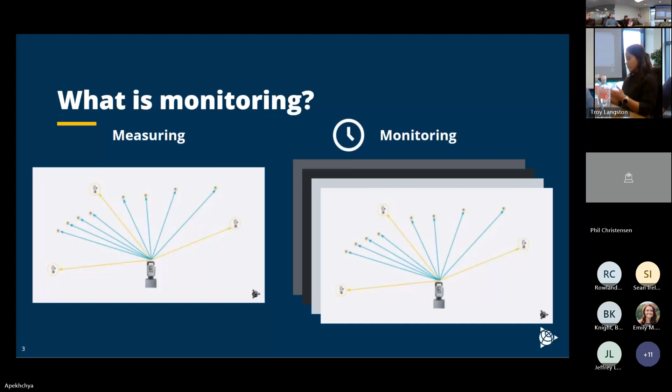So more technically, monitoring is identifying the displacement or the deformation of a structure, an object, an area. And then this data that you get from monitoring is then used to see if any action needs to be taken for a project. So in construction sites, there's constantly something happening. There's big movement, whether it's excavations, moving heavy equipment, or the actual building of the building structure, and all that.

So a lot of movement, and the after effects of all this movement are not only within that construction site bubble. And depending on the scale of the site, its effects can be pretty substantial. And so that's where we come in. I'll get into what we do a little bit later. First off, I'll go into why we need to monitor in the first place.

So let's take a look at some disasters that have happened in the past and how monitoring could have prevented it. In 2007, the Interstate 35W bridge collapsed over the Mississippi River. In 2023, last year, there was a massive sinkhole in Daisetta, Texas. Hopefully I said that right. In 1976, there was the Teton Dam failure.

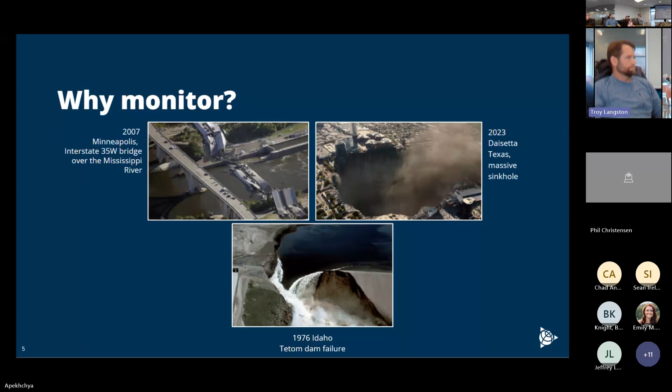And so these are very few examples of many that have happened over the last 100 years, where there have been big construction projects going on, and it wasn't properly taken care of. So with the context of those disasters in mind, why do we monitor? These disasters represent where monitoring systems could have provided insight to the operators, the project managers, and any stakeholders for that project before any critical failure points.

Monitoring, first and foremost, is for safety. Safety for workers and safety for the public. In addition to safety, if failure can be predicted, there can be actions that can be taken to prevent that failure from happening. And that way you can reduce costs of building, repairing, as well as any liabilities.

Finding these trends within movement can give a lot of insight into the structure's health. So for example, the expected lifespan of a concrete structure before it falls. And so this is related to managing the risks that are associated with any infrastructure. All structures have an inherent level of risk, and having the right data can help owners manage these risks and take actions to mitigate them.

And with all this being said, decision-making is made way more efficiently when you have real-time data for displacement trends, and when you have this data at the right time and in time. So we have two major categories in monitoring. We have the semi-automated systems, which you use for slow, subtle movements like land drift. The area or project is surveyed once a day, once a week, once a month. You don't have to do it too quickly or suddenly.

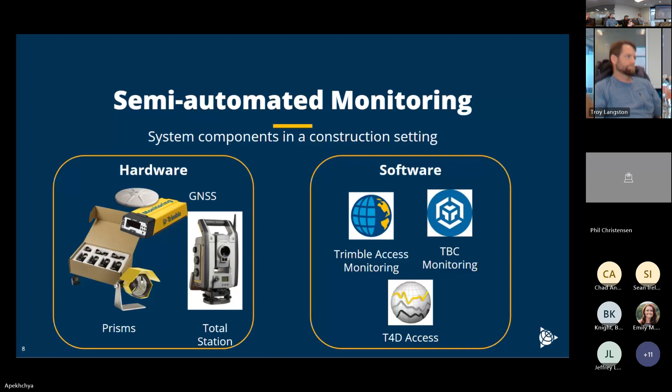So in automated monitoring, there's a couple more moving parts compared to the semi-automated system. So of course, you're going to have your prisms and your total station. And you're also going to have your M1, which is sort of a router, but it does a lot more work. So it manages and controls your total station, so you don't have to constantly aim your total station to every target every hour, or however often you do it. And then it sends all that data back to T4D.

And of course, you're also going to have a place to place the M1. So an M1 cabinet, a place to set your total station in the housing, a place to have all your GNSS equipment and all of that.

Some common sensors that are used in automated monitoring. So it's not just measuring positions. In an automated monitoring system, you can measure water levels, the temperature, stress on planes, if cracks are getting bigger, et cetera. So some common ones include piezometers, temperature probes, pressure cells, strain gauges, displacement sensors,

and all this data from the sensors is connected to the data logger, which is connected to the gateway, which then sends all that data to T4D. And you use T4D Control to process data and T4D Web to show data to stakeholders, to turn alarms on. And we'll go over T4D a little bit later on because it is a pretty big and significant software and a really big piece to this whole puzzle. Yeah, essentially, that's where the sausage is made.

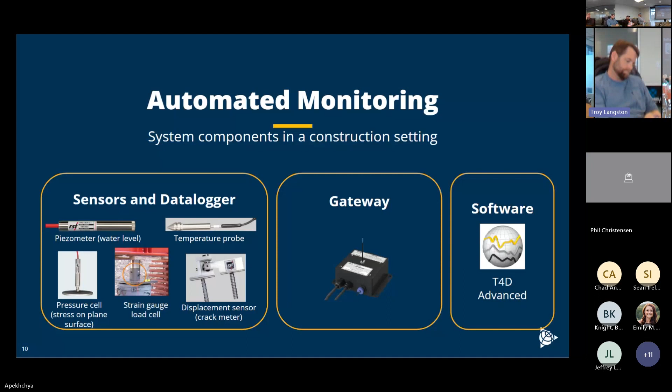So we get overwhelming amounts of data from all these sensors and total stations and receivers. And we need a really good way to organize it all, and we want to somehow make this data meaningful. So with T4D Control, we can enable automated movement detection, and also support informed decision making about the infrastructure. So you can manage your sensor data and how this data is being used at the same time as other systems on the site.

You can also process the data both in real time and for post-processing, using total stations, GNSS, and sensor data. You can also do a network adjustment of data from multiple total stations. And if there's a lot of data that you need to process, you can actually use several engines to process this in real-time and post-processing workflows. And you can do this all simultaneously to process the data in multiple ways.

There's also a lot of ways to analyze this data, and T4D provides a super comprehensive way to analyze it all, and also to present that analysis and data for people who may not necessarily do that analysis, but are involved with the results. Roland will be giving a short demo of T4D later on as well. And it's a super useful tool to both process everything and to tailor the viewer's experience to effectively communicate whatever it is that you need to communicate to the responsible parties.

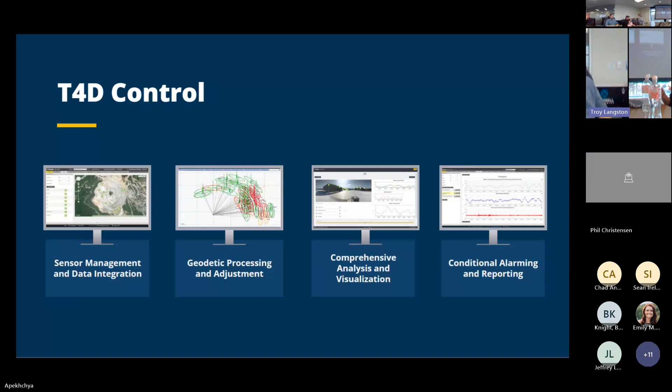All right. So before I go into more specific detail, are there any questions or comments? So I guess for people that have been doing a lot of manual monitoring, have you been mostly using just Trimble Access or SiteWorks and measuring manually, just shooting points? What do you guys do for your deliverables there? Do you just put them in an Excel sheet and send them out? Yeah.

Has anybody tried the Access Monitoring module? Would you like to? There's a 30-day demo that comes with all the Trimble Access licenses, so you can try out all the different modules. And most of the time, 30 days will get you through a pretty short monitoring project. So if you have something coming up, just load the demo on there. The Access Monitoring module is kind of the most intuitive module to use in Trimble Access. You don't need training or anything special like that. It just does what you hope it would do.

And so I recommend if you have something coming up, just download it, throw it on there, use it for an hour before you go out there, just so you're familiar with all the buttons. And it'll run and just collect all that data for you without having to go and shoot all those sites manually.

So it's a huge time saver. Just to bridge the gap on that a little bit. So this is through the Trimble Installation Manager on your data collectors. So if the data collectors are online, you can run the Trimble Installation Manager. And this is what Roland was talking about. If you just look at additional modules, all the different modules will show up there. There might be 8 or 9 of them now.

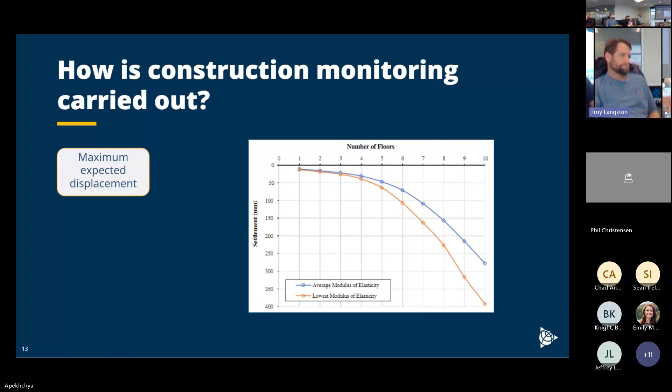And you can also create displacement expectations based on the typical and natural movement of the area or the structure as well. Then depending on what the allowable limit is, you can determine what your accuracy requirements are. So what type of equipment do you need, or what type of surveys do you need done. Then you get into the initial survey design phase. So what does the site look like? Where do your control points go?

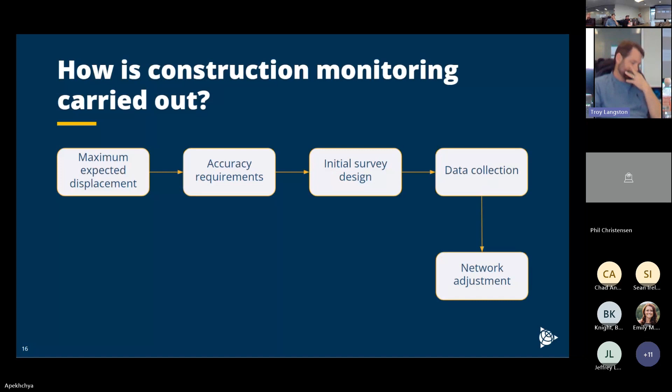And before any work is actually done on the site, reference points need to be permanently monumented outside the region of influence, which is the area that will be impacted directly from the construction area. And fixed monitoring points should be placed on the object or an area that you need to monitor. And this can be placed either during the initial design phase or when you're doing the data collection. So during data collection, you do the actual survey, and then you do a network adjustment, just as you would with any survey.

And then you do the modeling of any deformation that might be happening. So is there any significant deformation happening? And this could be through Excel, which is very accessible, but it can be a little bit complicated. Or you can run this through a dedicated software program. So this is a screenshot from T4D. And all this data is automatically fed into T4D. And you don't have to move any USB sticks or whatever is used to load it into Excel.

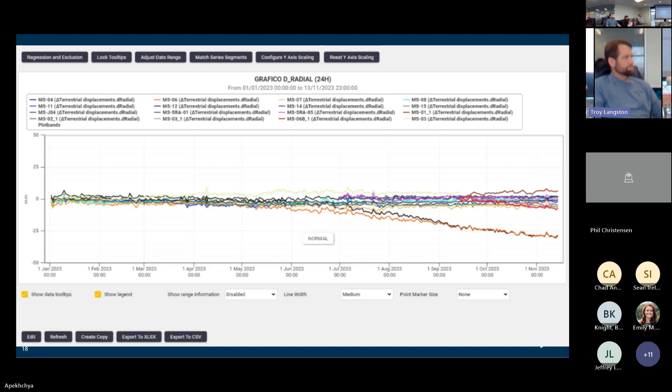You can see that the two targets, the orange and black over here, are for some reason moving way more than they should be. It should be fairly level. And so now we know we need to check, is there anything happening with these targets? Do we need to send out people to fix something on the site? Or is it just a target that moved? Who knows? We need to actually send somebody out there to check on it. And so, yeah, this is super useful for that. Then finally, the data is presented to stakeholders and the people who actually make the decisions. Any action that needs to be taken is taken.

All right, so then, why do we need to monitor in the first place? What is its importance? Firstly, we need to quickly detect the early signs of a structure's movements to avoid any disasters. So, for example, if there is an excavation or some kind of heavy construction work near a standing building, it's important to monitor the building's movements, especially if there's people in there. It's the responsibility of the construction site managers to make sure they don't negatively impact their surroundings.

And once movement is detected, how can further movement be prevented? Usually more movement means more chances of a structural collapse. How do we prevent that? And it's much more expensive to reconstruct a site than it is to check for movements in the first place. Cost is one thing, but any drastic movements could also come with a potential loss of life. Properties can be damaged if a building or structure moves or tilts too much from its allowable movement. There's a lot of substantial repercussions that can come from it.

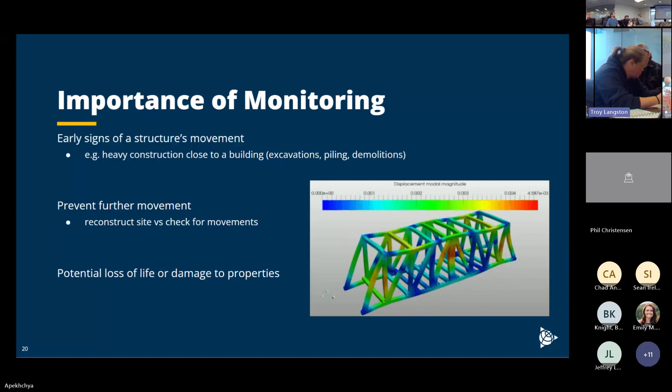So, as I'm sure all of you know, construction sites are extremely busy. There's always lots of people moving around, moving things around. Multiple tasks are happening all at once. There's equipment and material and dirt constantly being moved around. And because of that, if you measure the position of something on site at the beginning, that position might not necessarily be the position of that object the entire time.

The consequences of that can be potentially drastic and even fatal. So if a nearby infrastructure moves and it's residential, then an evacuation needs to happen right away. There's a possibility of a collapse, which can cause injuries, property damage, death. If soil on or around the site moves, then that means the infrastructure on that soil has the possibility of moving as well.

Both infrastructure, like buildings and whatnot, but also trees, and there's a lot of regulations that you have to follow for flora and fauna as well. Soil movement can also affect underground structures that you can't necessarily see. And so there are a lot of connections to soil movement. And if you don't detect movement in time, it can cause extensive delays to the projects, and it can even get canceled.

Now I'll be getting into where we... so we create monitoring systems for all sorts of application types, and our more general solutions can fit the bill for a lot of application types. So firstly, I'll get into excavations. I'm sure you all know what excavations are, but essentially excavations involve the removal of rocks and soil and other materials on the construction site to prepare for building whatever it is that you need to build. Excavation is also very foundational for a stable and level foundation, and that pun is intended.

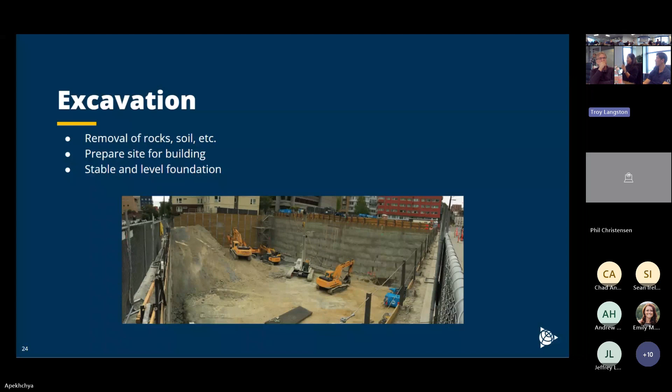So the removal of soil takes away a lot of structural support for the surrounding area. So that means safety is compromised. A lot of work is needed to ensure that either the surrounding infrastructure isn't affected, or some kind of shoring or supporting structure is added to the area. And bigger surrounding infrastructure, so commercial buildings or crowded infrastructure downtown, let's say, also means that a greater force is exerted on the excavated area. So if there's retaining walls that are put in place to either prevent movement or as a fix for movement that has already occurred, you still need to make sure that the wall itself isn't moving either. And these are just examples of how a retaining wall could move.

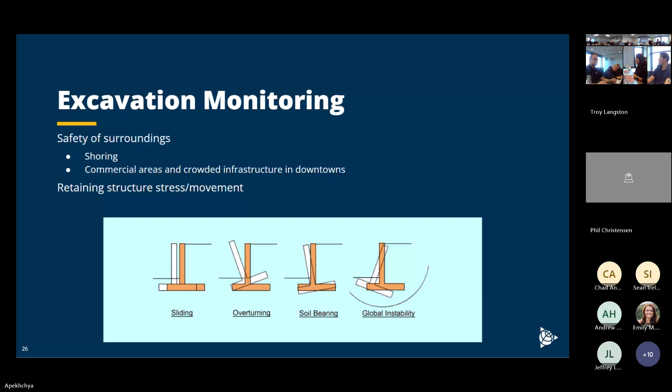Excavation monitoring also ensures that the construction design can work with the current site parameters, because your initial assumptions aren't always going to remain the same. The design can also be accepted when monitoring models show that the extent of any failure is controlled by the additional support that was added onto the site, that the support isn't overstressed, and that the displacements that were detected have been stabilized. And so when displacements are monitored, the predictions of the design plan can be confirmed.

And last but not least, the structure still needs to be monitored even when construction ends. Any changes or risks that happen to the structure after construction has ended will need to be translated to the building owner, especially in areas that have unstable ground, or areas that have a lot of climate change or something like that, and it's not a very stable area. So now I'll get into structural monitoring.

So what you're monitoring is structural health - what is the structure's integrity, and is it safe to be on? Monitoring can identify and mitigate potential risks or vulnerabilities, providing data for informed decision-making during design, construction, and operation. This extends the lifespan of the structure through proactive maintenance rather than reactive maintenance.

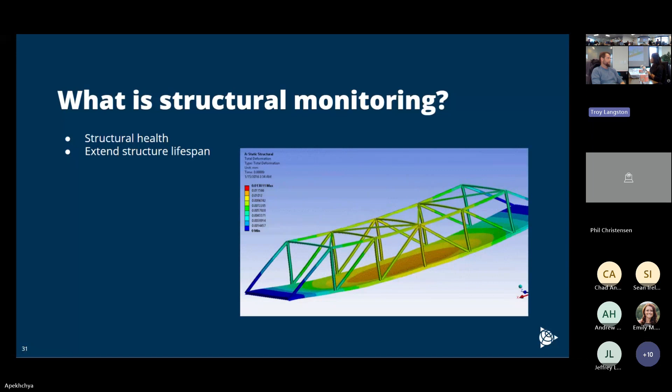However, in this case, you can see it's moving way, way more. The bridge deck's movement is way over the given threshold, and it's going into the red. So this needs to be brought up to the right people to take the proper action.

So what structures can you monitor? Buildings, bridges, dams, tunnels, heritage sites - basically any physical object can be monitored.

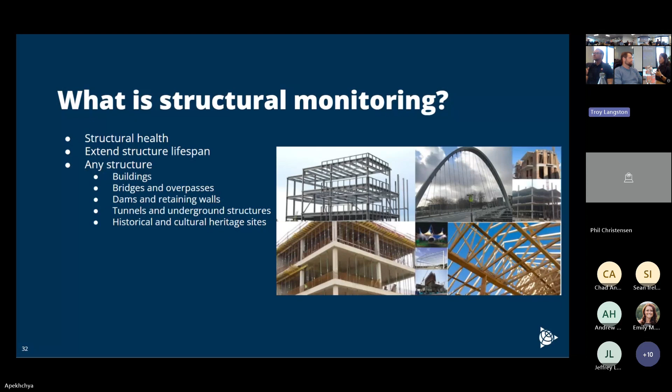So yes, you can monitor these, but what are you actually looking for when you are monitoring? You're looking for deflection, for vibrations, for strains, for major temperature differences. Are the cracks increasing in width? What are the displacements? How is the load being distributed across the structure?

By looking at all of this data that's continuously changing, you're able to reassess risks and see how the conditions are evolving.

All right, so now I'll be getting into the specific equipment that you will be needing for a monitoring site for construction.

For hardware, depending on your deliverables, you're going to want geotechnical sensors. Some common ones include tilt meters and strain gauges, an inclinometer, but again, that depends on the site requirements.

Typically, you'll also need a total station. For monitoring, you usually use the S7, S9, or SX12, again depending on the site requirements. You can also use GNSS on your site - typically the DA2, R12i, or the Zephyr 3.

For software, you typically use TA Monitoring for when you're in the field, and for post-processing, either TBC Monitoring or T4D control.

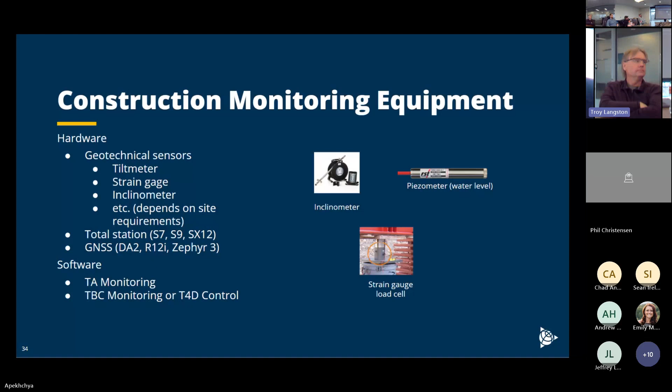And as for accessories, of course you need prisms if you use total stations. And if you would like to create an automated system, you're going to need a solar kit if you don't have a power source that you can connect. As long as you have proper sunlight in your area, you can use this solar kit to automatically power your monitoring system. We can get more into that if you guys are curious, but I don't have that in my slides for now.

So I'll talk about some other applications, I just won't go into depth about them.

So for piling - essentially you prepare the ground to carry really heavy loads, whereas if you didn't pile, it wouldn't be prepared to carry whatever load it is that you're putting on it. It's a very highly skilled job, and there's a lot of moving parts to a piling job.

What you're monitoring in this type of project is the movement of the pile itself. What are the stresses on the pile looking like? Is it settling? Is it tilting? Is the design actually working? You can calculate data from these sensors in T4D.

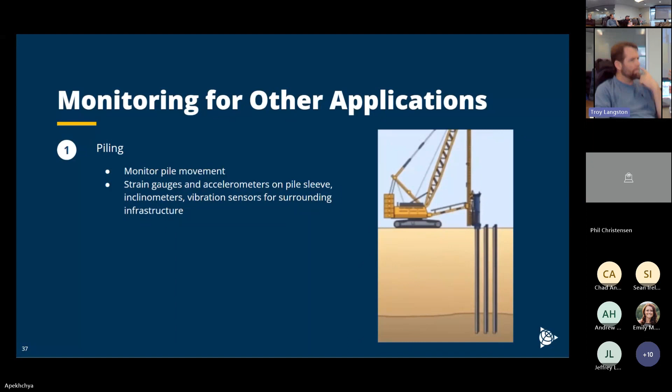A couple of sensor examples would be strain gauges and accelerometers on the pile sleeve itself, inclinometers for if it's tilting or not, and vibration sensors for surrounding infrastructure, because on a construction site it's not only affecting the site itself - the surrounding area needs to be monitored as well.

So dewatering - when you remove groundwater or surface water from a construction site, or for excavations where water can't naturally flow out, examples like that. This really creates stability for construction work.

You can monitor dewatering systems by looking at pore water pressure, and data from this system can also be used to determine the pumping rate at which the water needs to be removed. Piezometers are often used for this type of application.

And lastly, demolitions slash blasting. This is often done to break rocks for excavations on dams, tunnels, and road construction. You need to monitor this type of application to make sure all blasts went off as expected. You also need to identify the maximum vibration and air pressure levels connected to each charge.

You need to evaluate the potential damage on surrounding structures. You need to reduce the intensity of explosive charges in case the vibrations and the air pressure levels exceed the thresholds that have been predefined.

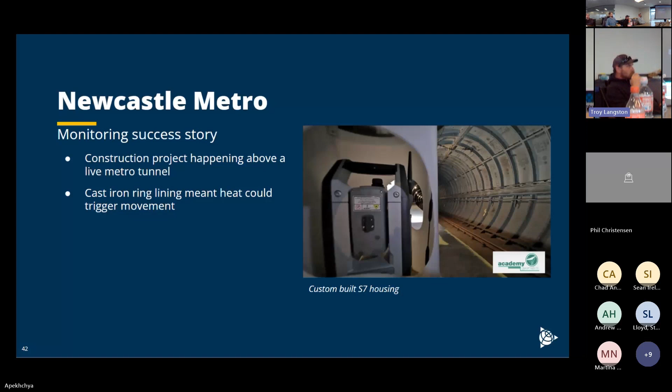The tunnel itself had a cast iron ring lining, so heat could trigger movement as well. That's a custom built housing for the S7 total station. In this next picture, because it was only surveying particular prisms within the tunnel, they actually created holes in the housing only for those specific prisms, and that's why it looks like that. But I thought it was pretty cool.

Because this was a live metro tunnel, it was only accessible for a short period of time at night without any trains coming in. So how were they able to execute it? First, during the design phase, they did a 3D laser scan of the tunnels so they had the proper information to make an effective plan. It allowed them to pre-plan where to place the prisms as well as the total station setup.

Their final solution consisted of a 1 second S7, an M1, and they used T4D Control for the post-processing and back-end work, with a total of 100 prisms used within the tunnel. A temperature probe was also attached to the M1 due to the lining being made out of cast iron.

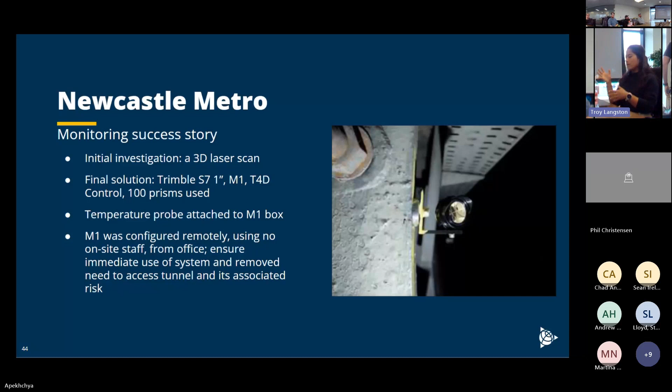The M1 was actually configured remotely, so they didn't have to use any on-site staff, and it was all able to be done from the office. That made for immediate use of the system, and it also removed the need to actually go into the tunnel while the trains were running, removing a lot of risk associated with that as well.

T4D was used to automate the alarms in the tunnel, so in case any significant movement happened, the proper people were notified, and anything outside of the predetermined tolerances was noted. The analysis charts and other visuals were super clear on T4D web, where they were able to see what was going on in the tunnels. It made it understandable, so the people looking at the data didn't have to look at rows and rows of data, but were given graphs and significant ways to visualize what was happening in the tunnel without actually having to go in there.

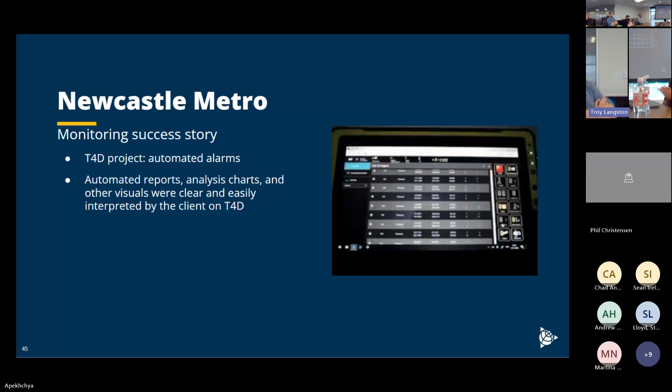Yeah, so it's a very short success story, but a success story nonetheless. And if you guys have any questions, or want to see more success stories, let me know.

Does the M1 help you with the changing environmental conditions, like figuring the parts per million on the instrument and all that stuff that needs to be used? So the temperature probe can be attached to the M1, but the M1 itself doesn't have a sensor like that. The M1 sends information to T4D or whatever software it is that you're using. And it also connects to the total station, controls it and tells it what to do, and tells it to run at specific intervals, all that kind of thing.

And it also connects to the sensors, if you have sensors, and it takes all the data and sends it to T4D. T4D handles the atmosphere too. So it takes the temperature from the M1 and then the pressure from the total station. It does the atmospheric pressure for it. And so it does round measurements and reporting and data, and then corrects it automatically. So you don't have to set up other sensors and do all that. Same question.

So is there a check system to make sure that the total station is always checking into, kind of like checking a backsight? Is that happening, or is it just constantly going through? It happens every single round. So the way that the automated systems work is that the total station's out there and it's installed and running 24/7. The M1 handles the temperature data measurement and the round controls, and it's got a built-in modem, so it just automates that whole setup.

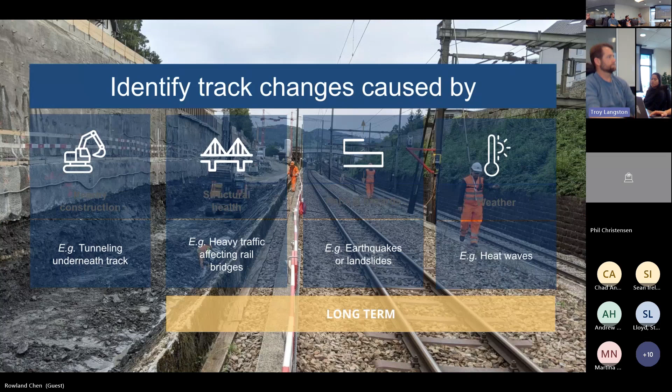When it comes to rail monitoring, what you're monitoring is also a big question. A lot of times when we see specs for rail monitoring in the US, it's really just driven by 3D movements or really vertical settlement. And so the parameters you're actually monitoring aren't always super specific. A lot of times that spec can be really, really loose.

But the advantage of the T4D rail system is that it gives you very specific outputs from your monitoring system, especially with total stations and tilt meters, around the actual parameters of the rail track, right? So we don't want to just measure for individual questions or individual data. What we want is to actually output really specific track parameters from the system itself.

Most of the time, what we see for these rail monitoring systems is that the authorities ask for pretty rudimentary data. They want the surveyor to go out and measure once an hour, once a day, once a week, and just give a coordinate set with your displacements and your coordinates on essentially a set of prisms on the railway. Well, what's actually happening is those rail authorities are taking that data and doing their own calculations on it to see how that track geometry is influenced.

And they usually start with the track geometry itself and understand what tolerances are in there based on the speed of the rail. And so if it's low speed rail, there's a lot of wiggle room, but with high speed rail and passenger rail, you have to be much tighter with your track geometry changes. And so that's usually the starting point they use to determine their accuracy needs and their threshold needs.

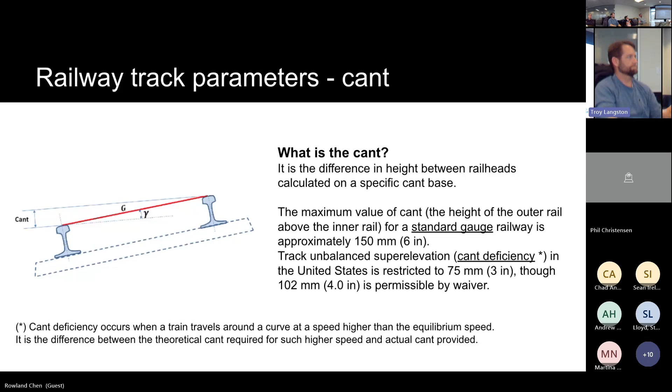A rail gauge is just the actual distance between both sides of the rail. Everybody uses a different kind of gauge. Freight has one, passenger has one. It just really depends on who built the rail and what it's being used for, and even at some points when it was built. The international gauges are all over the place, and every country has its own standards.

The nice thing about the Trimble track survey and scanning in the rail portfolio is that it has all these gauges preloaded in there. And so it knows the standard set of gauges. So depending on what rail you're on and what you're working with, it'll know the gauge and know that standard width and be able to report and measure to what it expects out of that gauge.

The twist is maybe the most important aspect of the rail, because the twist actually guides essentially the speed limits and the usability of the rail itself. I sometimes have a hard time explaining what twist is, but it's essentially cant over a certain distance. And so if you have cant at one point that's maybe an inch from left to right, and then cant at another point that's 2 inches left to right, the twist itself is really the difference in that cant over that distance of rail.

The higher the transit speed, the tighter these tolerances become on the twist. It's really the one that, when you're on a train, you feel that shaking. It's because the changes in the twist are there, and it's messing with the actual way that the train sits on that track, and it's very noticeable.

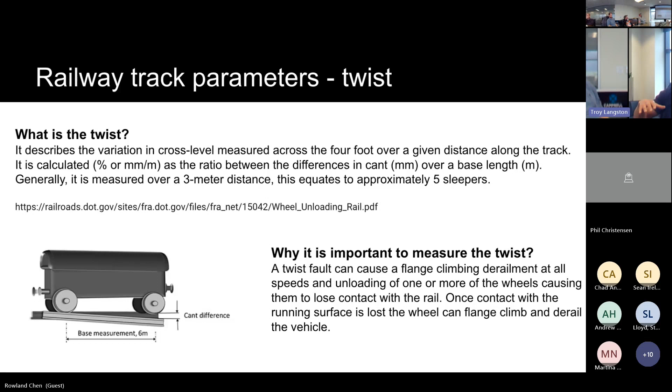The need for developing a rail-specific module in T4D really comes from the European standards. What we've seen is that Europe and Asia in a large part too is really leading the way in developing high-speed rail and linking everything between cities and countries with rail systems. What we've actually found though is the markets for building rail in Europe and Asia are more or less saturated. And so there's less and less need for building rail.

So what's happening is those companies are coming to the US and Canada, kind of North America, trying to bring their market from Europe to the US and help develop the rail system over here. And with that, they're bringing the standards over. So even though the US standards are fairly far behind what's happening in Europe, companies like Dragados, for example, a big contractor based in Spain, are coming over and building a lot of light rails. They bring with them their best practices and their understanding of how to work these rail systems. And they are really used to working with stuff like this.

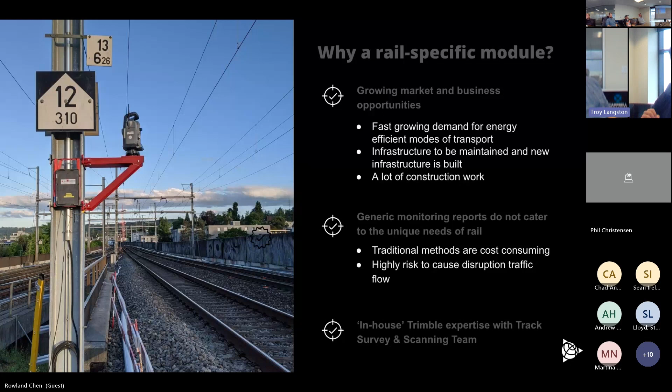And so even though we probably haven't seen a lot of these rigorous standards for the existing rail projects that we've been working on, these changes are coming. So people are going to be asking for these really specific parameters out of the system more than they have in the past.

The workflow in general is to really start with an understanding of the rail before any project happens. A lot of that comes from the track survey and scanning and taking a big as-built. A lot of times these as-builts will exist because a rail owner is going to have a general idea of what their track is and where it is, and some design. But most of the time, the actual rail in the real world doesn't match up with design in the office. So it's important to go take an as-built and understand how that rail exists.

Most of the time, somebody's doing this as-built, so it might not be you guys all the time as a surveyor going out there and deploying the monitoring systems. But know that there are tools for it. So if you see it asked for in the spec, you can very easily add that into your monitoring workflow, and it can be a piece that integrates with this larger picture.

After that, you go ahead and install all of your prisms on the rail track. You can measure the rail manually with a rail shoe or just a prism on a pole, but it's not quite as precise as doing prisms on the rail itself, or using something like a track bar, which I'll show you in a second, that can snap to the rail and make it a lot easier to measure. So there's ways that we can really make sure that much more precise data is being taken, even if it's just a pure manual survey.

Next, you use T4D Rail. You load in the as-built from the track survey and scanning portfolio, or even if it's taken somewhere else, you can pull that as-built into T4D, and then T4D will know that track geometry, and it can spit out all the prism offsets and all the calculations for you just based on your prism layout and your track geometry.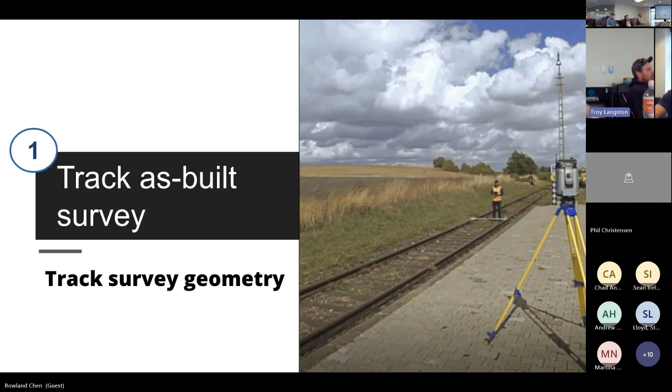The track bar is maybe the best thing to use if you're not doing rail as-builting consistently. It's a fairly inexpensive solution. Comes with prisms. It's really easy to use. The Track Gauge Survey app is fairly intuitive, and out of those things, you can get a really good as-built.

The Trimble GEDO system over here, the cart, is very similar to the track bar, but instead of picking it up and moving it, you just push it along the track. It's a much faster system, and you can spec it in with all sorts of other sensors and accessories. So instead of just prisms and total stations, you can use GNSS and IMUs and scanners and do all these dedicated track workflows. So if you're in the rail world consistently, the GEDO is a completely essential tool.

If you have any questions, you can email me afterwards. We can do a separate session on the GEDO system, but it's a really good solution. That combined with the GEDO Office software lets you do essentially anything on rail.

A really common workflow is you can put an IMU and a scanner on the GEDO system and then push it, and the IMU auto locates your scan as you go. Then you can scan and do things like clearance measurements and tolerances. So especially after a rail update, you do an as-built with the IMU, and then the scanner checks all the things in that area, like vegetation or overpasses, so you do a lot of clearance verification. So it's a really clean workflow.

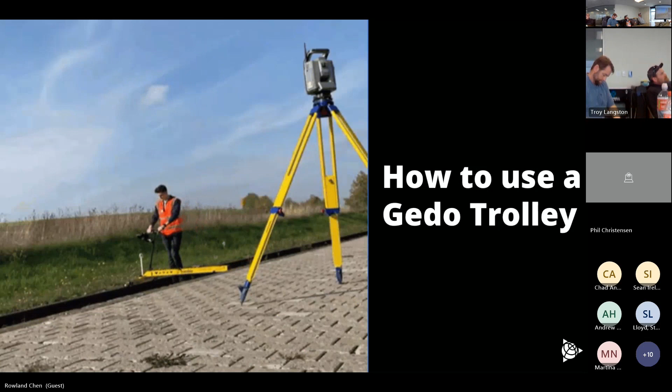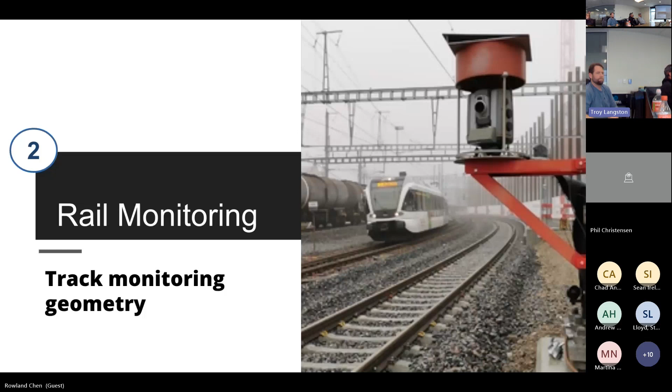So now with the rail monitoring system, there's essentially two ways to do rail monitoring. One is with the actual as-built from something like the GEDO system or the track bar. We call that the absolute workflow. When you set your prisms out on the railway, you set them out in what's called the chainage, essentially a pair of prisms that you mount on the sleeper or on the rail itself. The chainage is how everything on that rail is referenced, with respect to some distance along that rail.

So you might start at chainage 10,000, then go to chainage 10,040, and along the way you'll have prisms at X spacing. In T4D, you tell the system what the prisms are, then it automatically marks those chainages for you and gives you output at different chainage locations. So when you do your initial setup, you set your prisms up in pairs as chainages down that track, and the system takes care of the rest of the calculations for you.

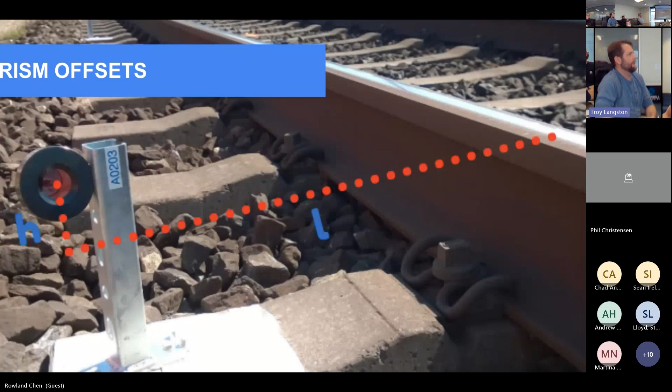One of the big advantages of having your prism locations and your track geometry is that you automatically calculate your prism offsets. One of the challenges with either automated or manual monitoring in a track system is that there's always some offset between the actual prism and the top of the rail. So when you output coordinates, it's pretty unclear if those are the top of the rail itself or the prism or the sleepers.

So it can be confusing if you're just delivering a raw set of data to somebody. They might not know exactly what is being reported on. And your prisms aren't always mounted perfectly to the rail. Even though you're theoretically mounting the same way every time, if you mount a few hundred of these things, chances are some of them are going to be a little bit off.

And so when you report on your prism locations and your deltas and your changes, it doesn't always give you a good offset from, or a good estimate of, what your rail is doing. So what T4D does is it automatically calculates the offset between the prism and the rail. And so you can very easily mount all your prisms in different ways and have no standard, and T4D would still be able to snap it and lock it to the top of the rail. So that way all the data that's coming out is going to be the actual rail geometry and not just the relative prism change.

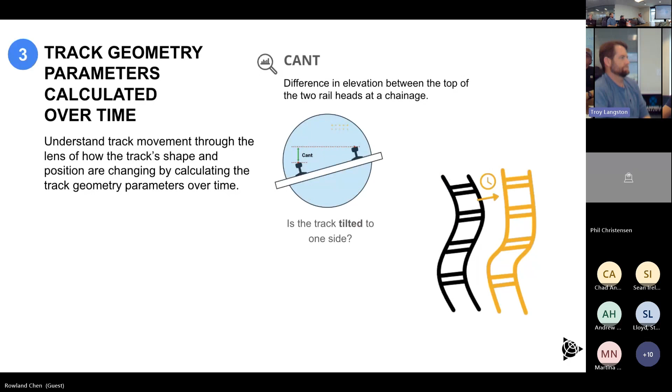The other thing that it does is it automatically calculates your track geometry changes over time. So it gives you the actual change in the cant and the actual change in the twist, and not just the actual change on that prism data. So what people get out of the system has a lot more to do with what they're interested in seeing. Some people might want to see the change in the vertical or horizontal alignment. Some people might want to see a change in cant or change in twist.

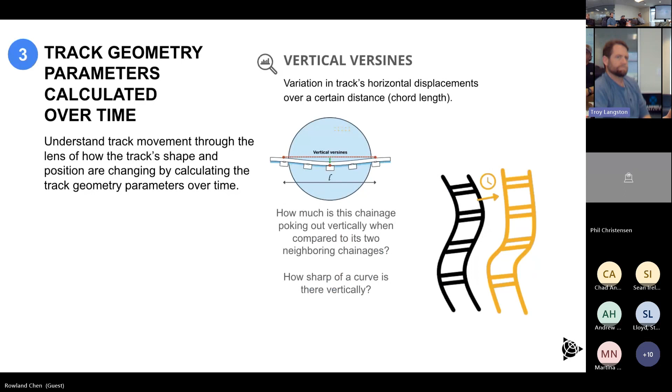And so being able to get all those data sets out of T4D and have it calculated automatically for you is a huge value add, a huge asset. It sets you guys apart from the rest of the people out there that might only be doing manual surveying or automated surveying or just giving data on the prisms. You can output these really specific parameters with pretty minimal effort.

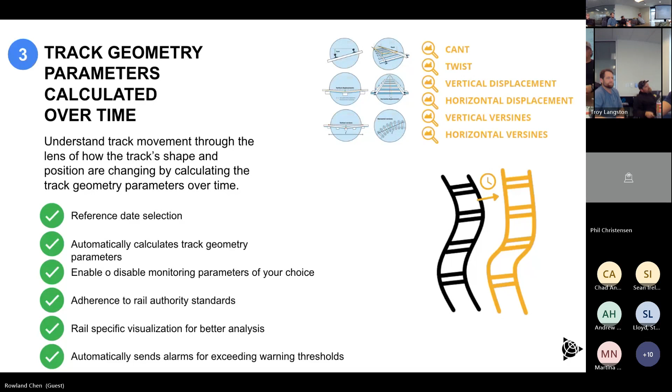The other way to do it too, you don't always have to use a fully automated system. So you can use data that is manual or automated in T4D. So even if the project doesn't require data 24/7 or data every day or data every few hours, you can use Trimble Access Monitoring and set your survey up and record your prism measurements semi-automated or manually, and then load that data into T4D and get all the same calculations out of it. And so instead of having to do the calculations manually or outside of T4D somewhere, it's all kind of done for you.

The fully automated setups, there are a lot of advantages to them, but they're not always required. So the goal with the fully automated systems isn't just to automate for the sake of automation, to get rid of somebody's job or add complexity where it's not needed. The whole goal is to enable you guys to go get more projects. Because if you're totally fine to go out and measure things manually, that is a good workflow and you can make money on the billable hours. You can give the client their data and everybody's happy.

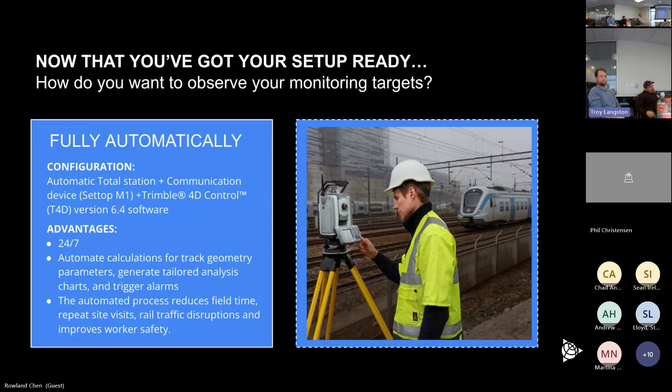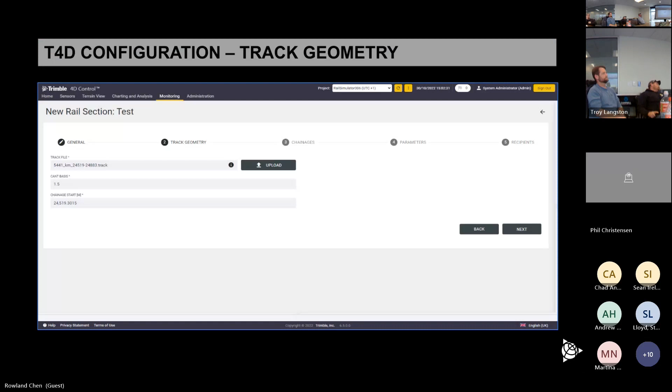But the fully automated data lets you go and bid on these projects that are happening 24/7. They're happening for years and years at a time, where it's really not feasible to have a surveyor out there. That's where the automated systems really shine. So I'm just kind of skipping it.

And on this one, there are two different workflows in T4D. So there's the absolute measurements, where you're taking the data from the GEDO system and the rail as-built and loading it into T4D. And then there is what we call kind of a relative system. So if you don't need the actual rail geometry itself, if that's not spec'd in the project, you can still do all these calculations as relative calculations, still using an automated total station or a manual total station, and T4D just does those calculations for you.

So you go into T4D and you essentially build those chainages out and you give it a pseudo rail track and a kind of loose starting set for the geometry. And then it will do your delta cant and your delta twist and your delta for the horizontal and vertical displacements without giving you the actual absolute value there. So it doesn't assume that it knows the track geometry, but it still gives you all of those relative parameters.

I guess one of the advantages to something like that is that it's a much simpler workflow, and you can use other sensors along the way. And so if you need data 24/7, but there's not really the budget to go in and bid 3 or 4 automated total stations, and that's just going to be too complicated and too expensive to set up, you can go in and you can install tilt meters, because the tilt meters are much more inexpensive and easier to set up and don't require line of sight.

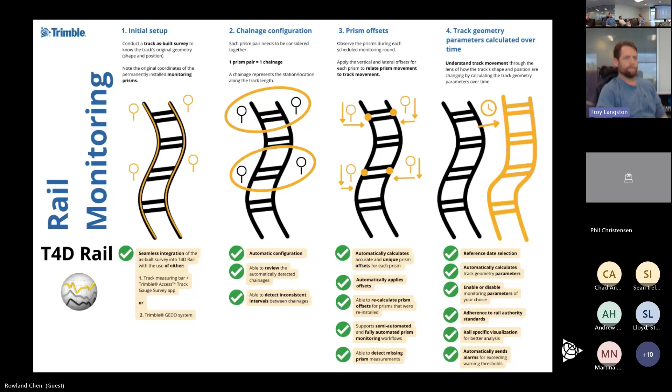So the tilt meters are part of the geotechnical portfolio, complementary to the geospatial side. We find that they typically go hand in hand. Monitoring is always done either with survey data or with geotechnical data, or both, so almost every site is going to have multiple sensor sets. The whole idea behind the geotechnical portfolio is that it's very complementary to the geospatial side, and from a technical perspective, it's fairly easy to implement these sensors and pull them into a single system.

The way it works is we have our data logger, or sensor, that runs in the field. The tilt meters have an embedded battery and tilt meter in them and a self-contained data logger. For other sensors, all you have to do is plug that sensor into the data logger, and it automatically collects all that data and transmits it over.

Each data logger is essentially an autonomous device with batteries inside and a long-range radio. It sends data from the data logger in the field back to a single gateway location. The gateway has an embedded 4G modem and Ethernet port and acts as that big comm center, collecting all the data from the geotechnical sensors on site, getting it online, and transferring it over to T4D for further analysis, reports, and alarms.

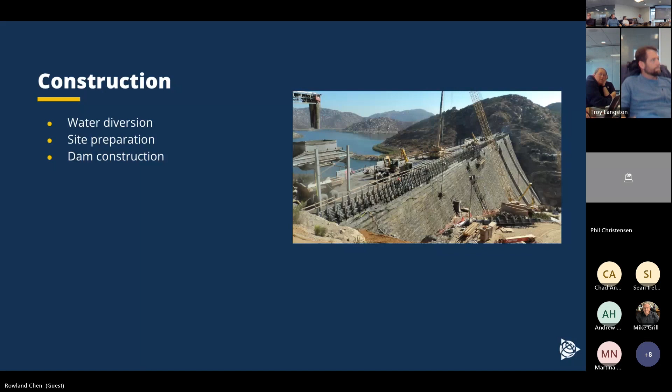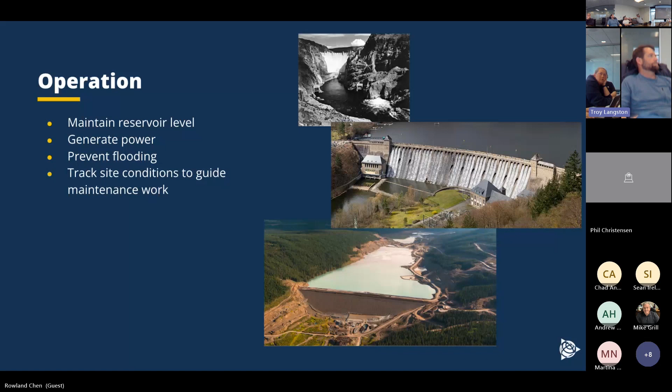On the operation side, this is going to be the bulk of the work that goes into a dam, because dams are out there for 100, 150, 200 years at a time. Most of the work that happens around a dam is operating and maintaining it - making sure the reservoir stays at a good level, if the dam is generating power making sure those generators stay up and online, preventing flooding, managing water levels and flood risks, and tracking site conditions to guide maintenance work.

On the maintenance and update side, this is really where we're going to see a lot of new work happening around the dams. Operating the dams takes a lot of monitoring and instrumentation, and when dams are updated and going through big maintenance periods, there's going to be an increase in the monitoring used, or revamping of the monitoring and instrumentation plans. That happens and goes along as things are operating.

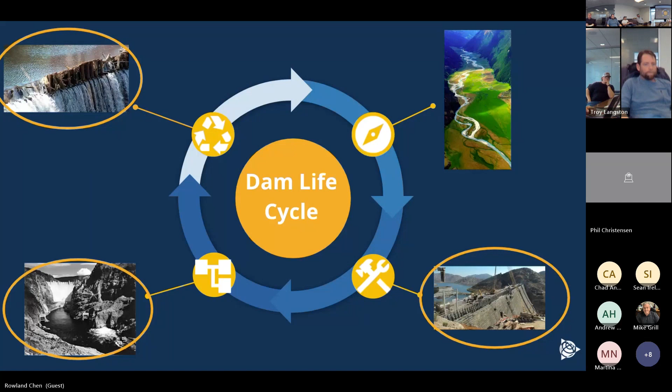In terms of where surveying is used - on the exploration side, surveying is really primarily not used. So it's in the building, operation, and maintenance of dams where it's used. There's very few large new dams being built; a lot of the reservoirs and rivers we have are already dammed to quite a large capacity. So most of the work we're going to see is on the operation side, the maintenance side, and construction for replacement dams.

For monitoring and instrumentation - it's used for a lot of different reasons on dams, but the biggest thing it's used for is always informed decision making. We want to make sure we're taking data sets that make sense, so that someone who needs to make a decision can back it up with the right data. Sometimes that's total station data, measuring displacement and movement; sometimes it's GNSS; sometimes it's weather; sometimes it's just a scan comparison of the dam face. Whatever data we have, we want to make sure we're backing up our questions with the right information and have the right sensors on board to report that data.

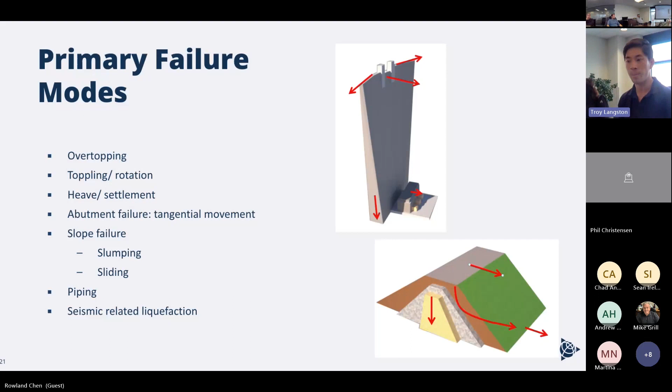The common instrumentation that we have, on the geodetic side, includes the total station and GNSS, especially when it comes to the automated side - those are the primary tools for measuring movement. But there's also other tools we can use in the geodetic portfolio, one of which is as simple as a visual inspection - just having somebody there to look at the changes and track what's happening to the site. We're introducing things like cameras, or sometimes we can take pictures using the total station during their round measurement to track those changes over time.

A lot of times, a monitoring system isn't going to be able to replace somebody that's going on site. Most of the time, the monitoring data is used to supplement somebody that actually goes and tracks those changes and makes a visit to that dam periodically. Even with all the sensors in the world, it's still possible to miss some finite details. It might be as simple as, if you go to the site and see that an area is wet and it wasn't wet before, that's something a total station or a piezometer or another sensor might not have caught. So we always want to make sure we're using the right monitoring technique, even if it's as simple as having somebody go and inspect.

On the geotechnical side, again, there's a million different types of geotechnical sensors, and every dam you're going to use a different set of sensors. The most common that we see, though, really are those piezometers, those inclinometers, and on concrete dams, those crack meters. They're really going to be out there to measure the water level change, a lot of times that subsurface movement, and detect changes in the cracks along that dam face itself.

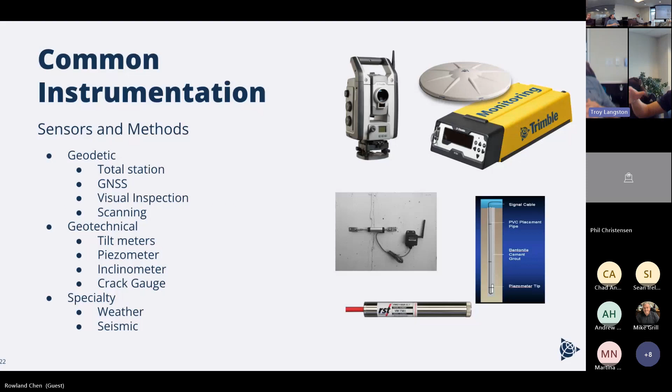On the geodetic monitoring side, really what we're looking at is measuring all of that surface movement related to whatever failure mode might be happening. So the failure modes that surface movement is related to are really that toppling and rotation, the heave and settlement, a lot of times that abutment failure and the slope failure.

We kind of think about slope failure for a dam in two different ways. There can be slope failure on or near the dam structure itself that can erode the foundation the dam is on and make the dam itself unstable. And there's also slope failure up in that reservoir. So if you think about a potential landslide happening upstream from the dam, if that landslide falls into the reservoir, it's going to push a huge wave down that reservoir and have some catastrophic effects on the dam downstream. Making sure we measure all the surrounding slopes can be a really important part of maintaining those dams.

A little bit more of a visual representation of how the setup goes on most dam projects. With the total station, you have it set up measuring all of your prisms kind of along the dam face. A lot of times they're going to be on the crown of the dam. And then you have your back sites that are set up off the dam, so you have something relative to resect off of and get good displacements for.

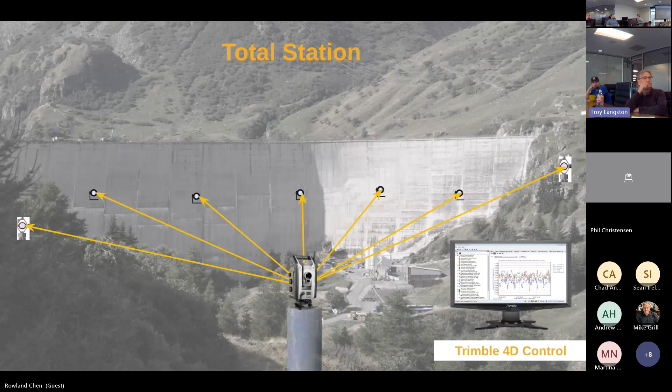You can use GNSS sensors, and there's a lot of give and take with GNSS versus total station. GNSS is typically a higher cost deployment because instead of buying a single total station, you have to buy the 10 or 15 or 20 monitoring points plus the base stations you're going to use for your fixed base stations for all the corrections and things like that. So it's kind of more of a specialty application.

The advantage to a GNSS system, though, is that it doesn't rely on line of sight and it can cover a much larger area. A total station might have a range of 700 meters for a standard one, or 2,500 meters for a long range gun. A GNSS system can have 35-kilometer baselines, so you can cover a much larger area. Especially if you're looking at potential slope movement around an entire reservoir, this might be a much more feasible thing to deploy than a bunch of total stations or a surveyor going out measuring all the time.

You can also get much higher data frequency out of a GNSS system. There's the real-time workflow and the post-process workflow, where your real-time data can be second or sub-second measurements, and your post-process workflow can be hour-long, 4-hour-long, 24-hour-long files. Real-time measurements are much quicker, but a little lower precision, so you want to use that for your worst-case scenario alarming. Post-process results can be much higher precision trends, sometimes comparable in accuracy to a total station - you can debate me on the ins and outs of that, but it gets pretty close. You can use that for a lot of your long-term settlement data, long-term movement data, and combine both together to have a really comprehensive system.

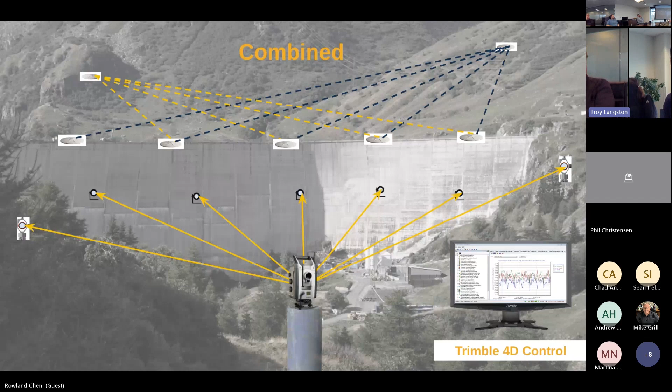On a lot of sites, not just dams, but any site in particular, especially the large sites, a lot of times it's not feasible to, or not possible, I should say, to install backsites in an area that is outside that zone of influence. So think about a big earthen dam or a big mine site or a construction site that's super confined in downtown in an area that you don't have good backsites. All those might be in that area that you think is moving. And so if you're running the resection off of those and those move, they introduce a lot of error that can be propagated into your foresights.

So the integrated system, what we do is we install GNSS antennas on top of those optical prisms and use that 24-hour post-processing data set to give you updated coordinates on your optical backsites. And then when the total station goes and runs that resection, it uses the most up-to-date coordinates. It is a little bit less accurate than just a standard total station setup because there is movement in the backsites and relying on that GNSS coordinate. It can be pretty tight, and we can get millimeter level trending with the antennas.

So it's a really good way if you expect long-term settlement or potential influence on your backsites. You throw that system at it, and then it can be trusted and run out there. Granted, it is a more expensive system because you have to have your integrated total station with your GNSS receivers. So it's more of a niche application. But when it's necessary, there's really nothing that replaces this kind of a setup.

I've actually covered it already, but there's also the semi-automated and the fully automated portfolio. So using either Trimble Access and Trimble Access monitoring and TBC monitoring to do your geodetic data, or that fully automated system that's got the total station and the geotechnical sensors integrated all together. You can also use any combination of that in between. So T4D can take data from semi-automated setups and fully automated setups and either import with like a CSV importer for all your automated geotechnical sensors.

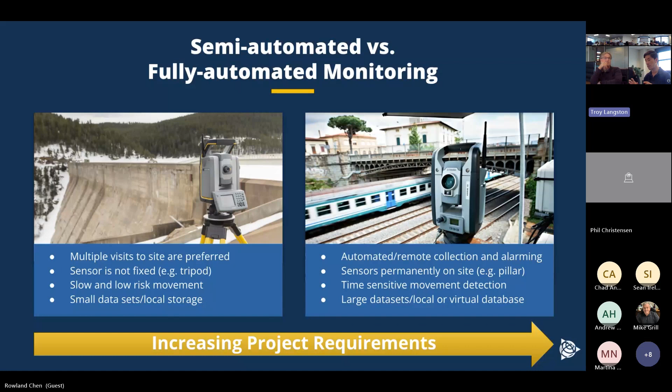On the geotechnical side, I always think about geotechnical sensors as measuring that subsurface data set. So very complementary to geodetics that are measuring surface movement. Geotechnical data measures the subsurface and a lot of times gives you the reason why something is changing and not just the result of it. Geotechnical sensors are used for essentially every failure mode because they can track those subsurface changes and really give you an idea of where that water is moving, how that structure is changing, how the surrounding area is changing.

And because they're much more specific sensors, like a crack meter, for example, can give you displacements across a crack. You can deploy them on very specific spots and areas around the dam. So the best monitoring systems I always think have both technologies involved and just deploy sensors where they're needed, depending on what risks that data is looking at.

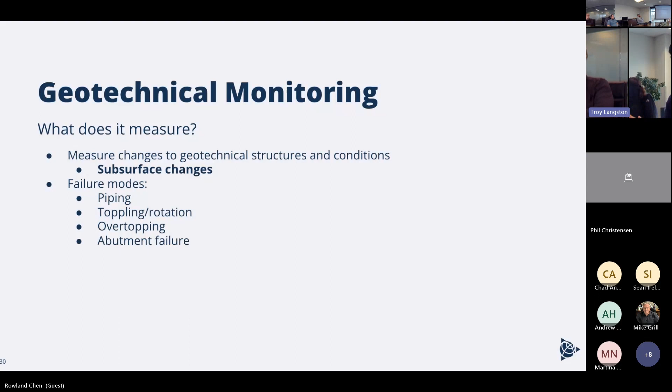And so the piezometer itself is installed down usually in a borehole, and there's some sort of water level in there. That water level changes, and then the piezometer, all it does is really measure that water level over time. We plug the piezometer into one of our data loggers, and that's how we automate it and get it online. A lot of times the dams or particular other construction sites will have these sensors in place, and people will go and measure it manually, or you already have existing data loggers.

And so adding the data logger in is a really easy way to automate that whole data collection, and then use that same technology that the tiltmeter has with that battery power and that radio to get all the data from the piezometer itself into the gateway and then into T4D for all that automatic change detection.

But it's the same idea as a piezometer. These are already installed on most sites. And all we really have to do is plug it into the data logger, tell it how long those segments are, and then T4D does all the math for you and spits out a big chain of displacements. So a really easy way to integrate that data together.

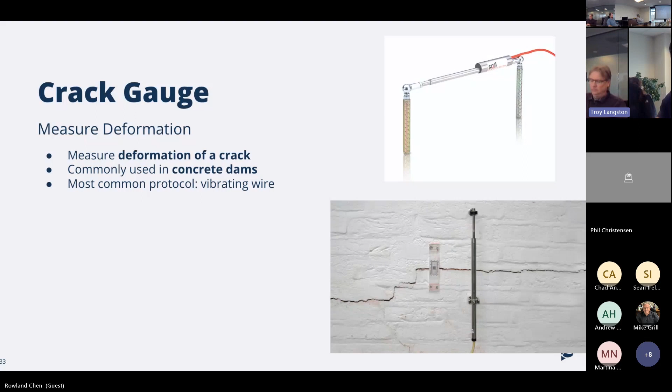Again, just a quick visual of the way that it works. So we have the sensor plugged in the data logger. The data logger's got that battery and radio, transmits to the gateway, and then the gateway sends that data into T4D.

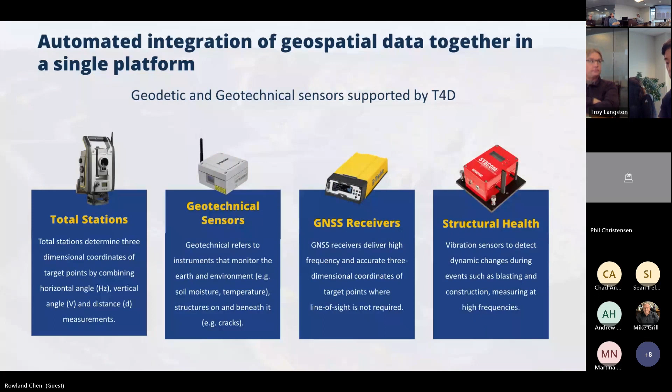It's been running since 2019 or so, which when I first started in this job was fairly recent, but now it's been running for a long time, and it's been a really successful project.

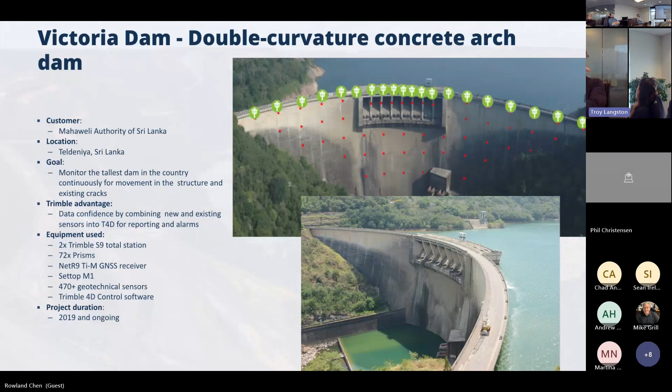So they could have very easily used total stations out here to get the same data that they're getting out of the GNSS system. The reason they went with the GNSS monitoring system is more to do with the comfort level that they have with the sensors. So the city of Seattle actually runs a VRS network, a gigantic network with base stations and CORS stations all across the state. And the guy that manages this system runs that network, so he's just very familiar with GNSS.

So for him, it was easier to take some old receivers, repurpose them, put them out in the field, not have to learn a total station and a new technology, and then pull those into T4D. And it's just a really comfortable workflow for them. So really good data. The system works really well, and it's an interesting case of personal preference dictating how the engineering is done.

So as you're out bidding on your monitoring projects, it's something to keep in mind. There's a lot of value in technology that's familiar and that you've used before. And then you can use that to break into the world of monitoring. And then you can slowly add on other sensors and build your own portfolio with that.

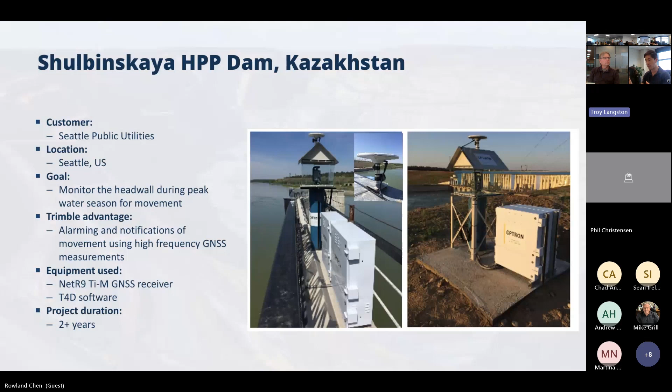But they're really worried about all of a sudden if it shifts downstream a few feet or a few inches, they're going to be really terrified, and they want to make sure that they can make the steps to mitigate all of that.

The Steenbras Dam outside of Cape Town. This one is actually operated by our local Trimble dealer. They're contracted from the city to go and essentially provide a monitoring system. This is a really cool project for us because it's actually been a development site in a lot of ways. And so they use total stations and GNSS and geotechnical sensors and T4D. And so we're able to take a lot of their feedback and guide a lot of the deliverables that we have and a lot of the different calculation sensors, stuff that we put into T4D. And they're also a big reason that we deployed the geotechnical portfolio in the first place.

The dealer out there is a really good partner with Worldsensing, who we use to manufacture and back us up on the geotechnical side. And so they were the ones that built that relationship for us and brought them in and showed us how to work with sensors. And then we used a lot of their feedback, brought Worldsensing on as more of an in-depth partner. And now we have a much more coherent system. So I think it's a cool example of using real world experience to guide what we're doing and how we're deploying it.

Do you guys have any questions on the world of dam monitoring?

And as you guys have seen a little bit, I'm sure at this point, there's a lot of overlap in what sensors are used where. And it's designed that way on purpose. Our whole goal is to help you guys get out there and get more business and be more successful through different technologies. And so we designed the whole system around being able to easily grow with automation, right? So moving from the manual sensors to the semi-automated side and then into T4D.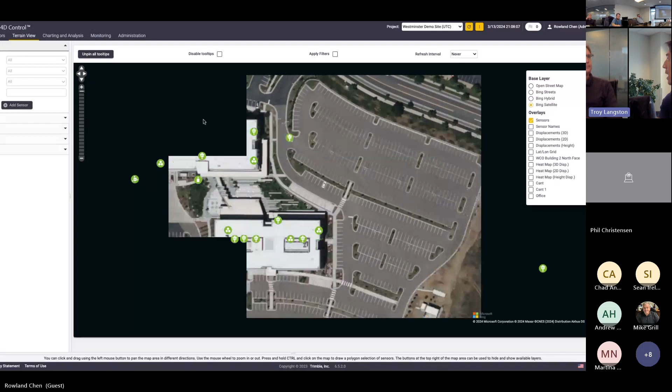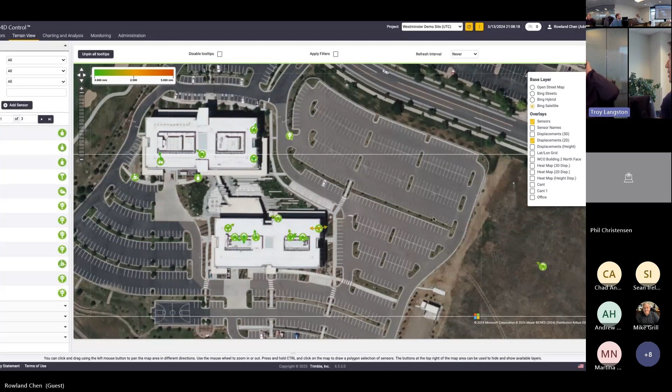And the map view is maybe the best way to get just a quick traffic light, quick status overview of the monitoring system. You can do things like turn on your displacement vectors to get a really quick understanding of what direction things are moving, and then turn on something like the heat map to kind of show you the severity.

So especially if you're looking at a site that's got a railway where things are settling, and you want to show construction and show that there's only influence in certain areas, the heat map and maybe not the 2D displacements but the vertical displacements are going to be a really easy way to show where things are settling and that severity. So it gives somebody a very quick understanding of what's going on the site without having to be an expert on anything. You don't need to be a surveyor to understand that these vertical displacements are red. It makes it very quick and very, very easy.

You can also do things like overlay images in the background. So if you have site plans and site drawings, as long as they're geolocated, you can upload them and give it like a transparent layer on the map. And then you can very easily show like, okay, the tunnel design goes right under the building here, and that's why we're seeing these movements here, or not seeing movements there. So you can show displacements or not displacement related to whatever is happening on the site.

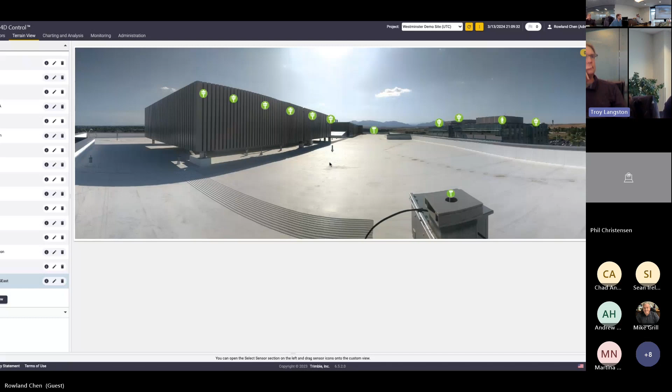You can also make your own kind of custom views in here. So this is like a static image of our office. I just took it on my phone and then uploaded it to T4D and then dragged and dropped some sensors in place. But this could also be a webcam feed from the site. So if there's cameras on site, you pull those feeds into T4D and then overlay your target information on top. And then when you hover over, it gives you an interactive kind of live view of what's going on.

This is a really good way to give somebody a quick overview of the site. So it gives you that custom view, some of the charting options, and you can do like a system status to show what sensors are online, what sensors are offline, the alarm intervals and alarm reports. The great thing about these custom views and these composite views is that they're easy to set up and should be fairly easy to look at.

You can also publish these to an open web page. So everything in T4D Web is restricted to your account. People can get set up with accounts and access just as needed and log in whenever they want. But these custom views, you can publish to an open URL and just send that URL out, and you don't need an account for it.

So somebody that's not interested in logging in or getting reports or getting alarms can just bookmark this web page and log in and view it as needed. This is a good option for somebody like a building owner. So maybe they own the apartment building that's next to the construction site that you're working on. You just send them this and they can log in whenever they want and check in and see it.

So if they think that something's happening, they can open the page up and verify that the construction hasn't influenced their building at all, or if it has, get an understanding of why that's happening. And then they don't have to be involved with the monitoring system. They don't have to get the reports every day. They just check in whenever.

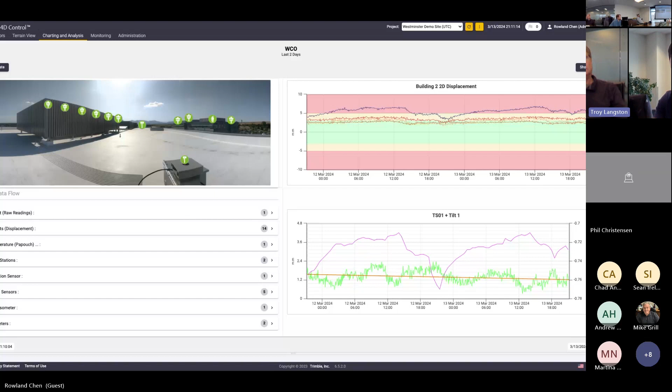You can also build in your own custom analysis. The analysis can be something like a chart or scatter plot, or if you have wind data, it can be like a wind rose or a precipitation overlay. So there's a lot of different options on how that data is displayed. This one shows in the background our alarm status, so our alert levels and how our thresholds overlay with the prism data. Then we have all of our 2D prism movement. So fairly easy to set up, simple intuitive chart.

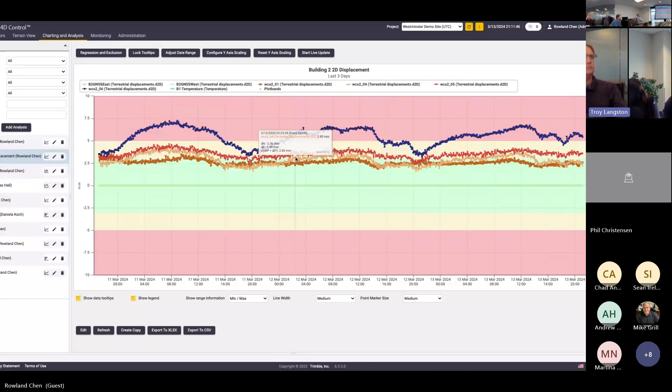You can also do things like integrate multiple data sets onto a single chart. So here we have our tilt data with our total station 2D displacement data to really integrate these things together. So on the roof at the office, we have everything set up on these big metal columns. And those columns move around throughout the day. The sun hits them and the temperature influences them. They just kind of walk in a big circle. And so having something like a tilt meter on top of that data gives you a really good understanding of not just how much it's moving, but also why it might be moving, because that column itself is tilted.

When you have really noisy data like this, and when I say really noisy, it's moving like a millimeter or two, you can overlay your trends on top of the chart. So when you have this big sinusoidal daily effect, sometimes it can be hard to extrapolate a trend. So T4D can automatically overlay that trend on there for you, especially on something like a railway that's going to move with the temperature quite a bit. Hopefully it's moving the same every day, so you can overlay that vertical trend and show it's not settling or it is settling or it's got some sort of typical behavior. So it makes it a lot easier to understand what could be happening.

There's also a feature in here called visual inspection. It's going to take a second to load. So the total stations all have integrated cameras on them, at least most of the S-series total stations that we make. And the idea is that when you turn to a target location, the system knows that you want a photo, so it's going to record a photo with every round measurement. And then T4D can display those photos over time to show you real-time changes.

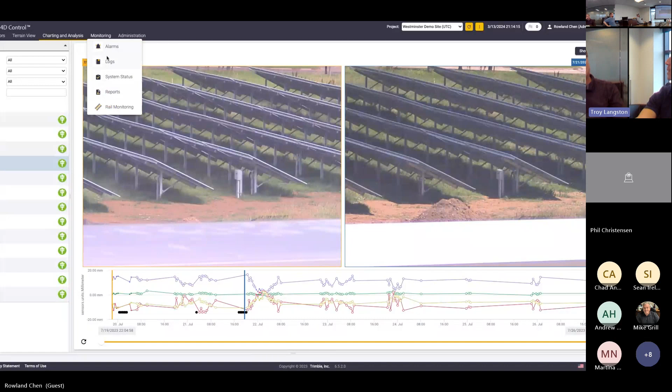All of the analyses that you build in the system can be sent out as automated reports as well. You can have as many different reports in the system as you need, and they can send out whatever data sets to whoever needs to get them. So you can very easily have a report that's an Excel sheet showing the actual prism 3D coordinates over time, and have that emailed out once a week to surveyors working adjacent to the project, or engineers that need specific data for other work.

And you can have something as simple as email the charts out at 8 a.m. before work starts, so that somebody can go in and verify everything's all still looking good, and you can go into the site and not worry about it.

The reports can be sent to any set of users. In T4D, you can have as many accounts as you need, as required by the site, and all the accounts can have different roles and permissions so everybody can be set up with their own level of access. So if you have somebody who only wants to come in and see the data and receive the reports, but not configure anything or get trained on making alarms or changes by accident, they can have read-only access, log in and view everything, but not make any changes.

You can also have somebody who can come in and make their own changes. They can have their own set of reports and alarms assigned only to their account, run reports whenever they want, and pull data as needed, but they can't make site-wide changes. And then you can have somebody with an account that can come in and be like a site-wide admin, resetting passwords, changing alarm settings, adding accounts, being that super user—really anywhere in between.

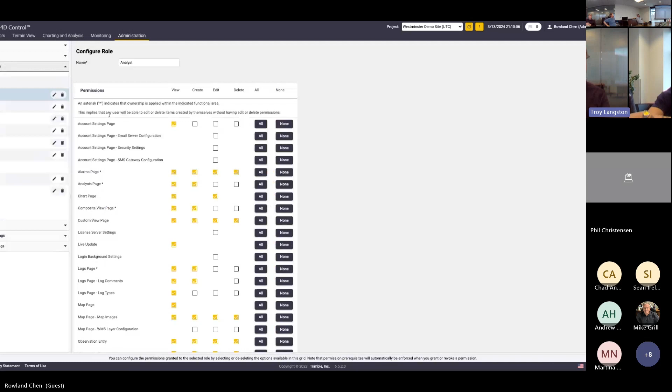You can also configure a custom role—it might be a little hard to see, but this is the features matrix for T4D Web. If you need somebody to come in and have a very specific set of tasks, an example I give sometimes is an IT person who wants to reset people's passwords and add accounts, but has nothing to do with the actual monitoring data. They can have read-only access for everything but the accounts page. Then when they log in, they only have the buttons they want to click, and you don't have to worry about them accidentally changing alarm settings.

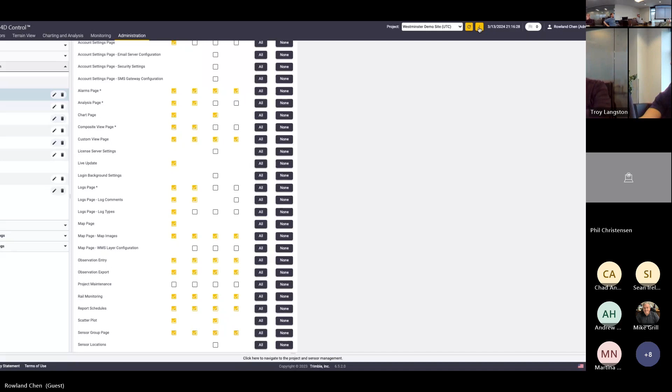You can also run multiple project sites in a single instance of T4D. The one limiting factor is that it can only use one coordinate system at a time, so you can't manage a project in Utah and a project in California both using state plane. But you can manage all projects across Utah using Utah state plane coordinates in a single instance of T4D, and each project can have its own bespoke set of sensors and accounts assigned to it. So if you're subcontracting for Kiewit doing a big rail project, and you have another project with Walsh doing a gigantic highway project, you can have different projects managed all in a single system.

Do you guys have any questions on T4D?

Okay, let me show the rail data too.

Have you guys ever used or gotten data from a monitoring system like this, or even another kind of data hosting site as you've worked on projects? So this is the first time you've seen something like this. Cool. I guess what are some of your initial thoughts before I dive back into the data sets?

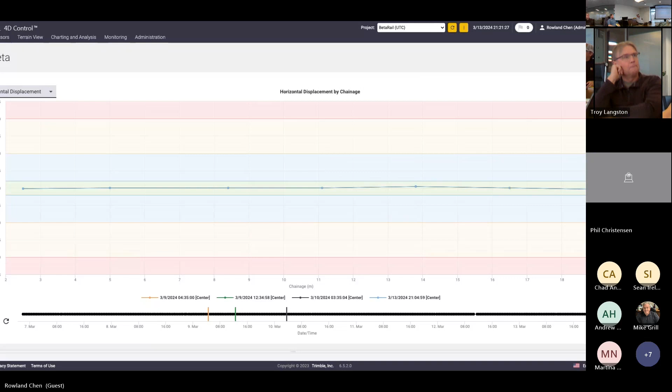You can also show your charts over time for a particular chainage. So if you wanted to zoom in on one section and say here's all of our data for the last few days - data is being taken every few minutes - and then you can go down your rail here. Here's our actual rail section, we can go through our chainage and show different sections. So it makes it much easier to show that data in a way that makes sense to whoever really needs to see it.

You can also use all these different geometry settings in your alarms. As soon as these rail sections are created, there's sensors essentially associated with those rail parameters. So when you go and configure your alarms, you can say, I want my alarm threshold to say if the cant goes under 6 millimeters, then that alarm goes off. That way you're getting alarms based on the change in the actual rail, not just on those prism displacements.

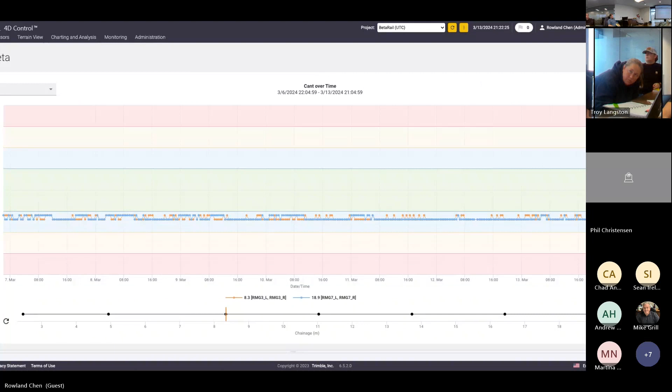Any questions on T4D Rail? Is that a separate module from the basic T4D web? It is, it's an add-on, so it's the T4D base license - you have to get T4D Advanced or T4D Geotechnical if you're only doing tilt meters, and then you add on that rail module on top of it. We're also always happy to give demos, so if you're unsure if it's going to actually work for the project and maybe people aren't asking for it, we're more than happy to give a 30 or 60-day demo if you're using T4D on a rail track, and then if it works, great, you can buy it and keep using it, and if not, that's okay too.

Great, well, nothing wrong with ending a few minutes early for you guys.

So do you guys think this is too complicated to just figure out, or use on a day-to-day basis? Because we could give it to UI people to try and make it simpler too.

Having used it, I think the setup was a little complicated, which is how I ended up talking to you over the phone so many times. But once it's set up, it just does the work for you.

Like right now, we're monitoring a rail on a bridge 2 hours outside of Reno. So I got to send somebody up there once a week to download the data the data collector has been capturing. He brings it back, I drop it into TBC, spit it out to a spreadsheet, format it, and send it off. That's a couple hours a week that when this is set up, I don't have to do.

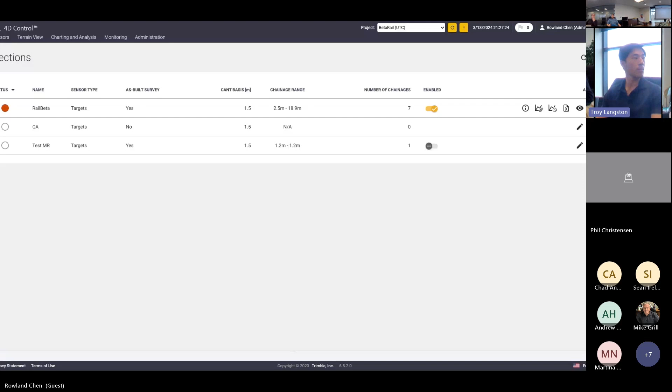Well, I know that whenever we quote a monitoring system, we always get Trimble involved right from the very beginning, because things have changed - there's new software, new accessories available that we don't know about. So we want to make sure we quote it right, and Trimble's really involved in these deals. Hopefully it won't be that way forever, but so like what you were describing, that sounds like the experiences we've had as well.

I was curious about the alarms - are they just email alarms, or? It's email, SMS, and batch files. Batch files are really used on mine sites and dams - sometimes we have to sound an alarm, so it can run a Windows batch file and execute kind of whatever you need.

The water treatment plant is right below the dam, and the people down there want an alarm. Yeah, sure. A true alarm, not an email that can be missed. Yeah, an email that might come and go. SMS with that. Yeah, and missing a text in it.

That was super helpful for us to have the alarms, because the first alarm would go to me. And then if there was a second alarm, that would go out to 6 different stakeholders for the project, most of which were Caltrans employees. When I got the first alarm, I would log in and try and figure out what was going on, so that usually by the time the second alarm came up, I would have an answer that I could send everybody: hey, don't worry about this false alarm, one of the prisms is blocked.

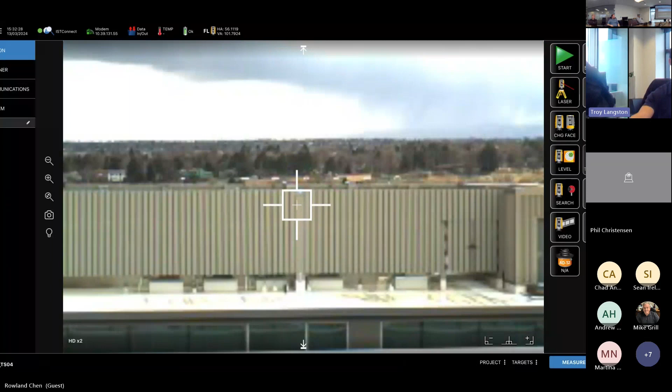So even if I just turn the laser on, we should see a strong reflection. Yep. And so even something as simple as that is a really good way to check if the prisms are good. If you know the prism's in a location and everything's fine, you can turn to it, turn the laser on and see if you get a reflection, and if not, it's time to clean. So it makes that maintenance super easy to manage.

You can also check the level, which, as simple as it seems, can fix a lot of issues. A lot of times the total station will go out of level and somebody will not realize it, and they'll try to run the rounds over and over again and think the whole system is broken, when really somebody just needs to go out there and twist the knobs a little bit.

Yeah, so it's a fairly easy interface to use. You can have somebody who's not a surveyor go out and set this up as long as they know how to basically use the total station. They don't need to know the backsights and the geometries and the coordinates and how to set it up. They can just do it this way. And then in T4D, because it's a separate interface, you can log in remotely and configure the actual information.

The nice thing about having the data backfill is you can also do that for the initial setup. So somebody can set it up on a Friday afternoon, it can run all weekend, and then on Monday morning you come into the office, log in, configure it, import all the round information from the weekend, and process all that data. So it makes it that much more flexible when you deploy.

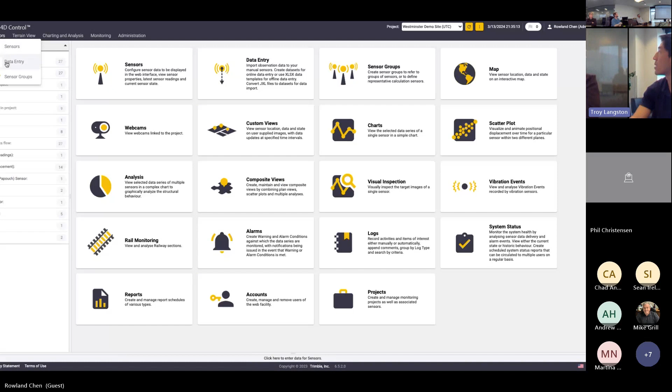I was thinking because a lot of ours wouldn't be automated. It would be us coming back and using this system as the monitor, so run up, get the data, upload it. The manual upload in T4D for total stations is free. As long as you have a base license, you can upload manual total station data and it doesn't consume any nodes. The geotechnical sensors will consume nodes, so with a CSV import or manual upload you need the right number of sensor nodes. But for manual total station data, you can just pay for a base license of T4D and manage all your monitoring data without buying individual total stations.

Yeah, that's why I was thinking more of just using it to manage my data, because I hand it off to an engineer and I have a feeling it gets lost. Then he calls me up and says, "Do you have that data you took 5 years ago?" It could be right here.

Yeah. There's an edition of T4D called T4D Access that's made for that manual data integration. It's the backend, T4D Server and T4D Advanced, but there's no connection to live real-time total stations. You can use a post-processing engine to scan for Trimble Access files and import them automatically, or manually upload the Excel templates into T4D Web. So exactly what you need. If multiple coordinate systems are a requirement for your project, there are back-end workarounds for that as well, but you have to talk to your IT team to create different instances of T4D.

So it can be complicated to do it, but it is possible and something we're working on. For sure. Do you know, is it going to be compatible with the new data? The state of Utah is doing hundreds of low distortion projections. Will it end up being compatible with those? It will be, yeah. It uses the Trimble coordinate system manager, which has had that on the radar forever. So as soon as the coordinate system manager is updated, T4D's got the same system.